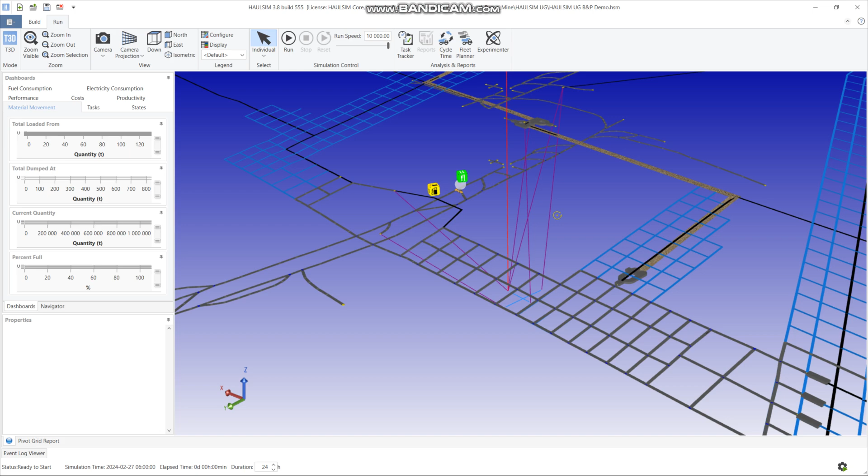Hi guys, I thought I'd just make a quick video of the underground bord and pillar demo that I created a while ago. So just to understand what you're seeing here, obviously the red line is the shaft going all the way to surface, and the purple lines are the ore passes going to the shaft bottom.

What you see with this funny material, that's the conveyor belt. So you've got a bottom conveyor belt. It's basically two levels that we're working at, the 380 level at the top and then the 290 level at the bottom, but they obviously join up because of the bord and pillar sections.

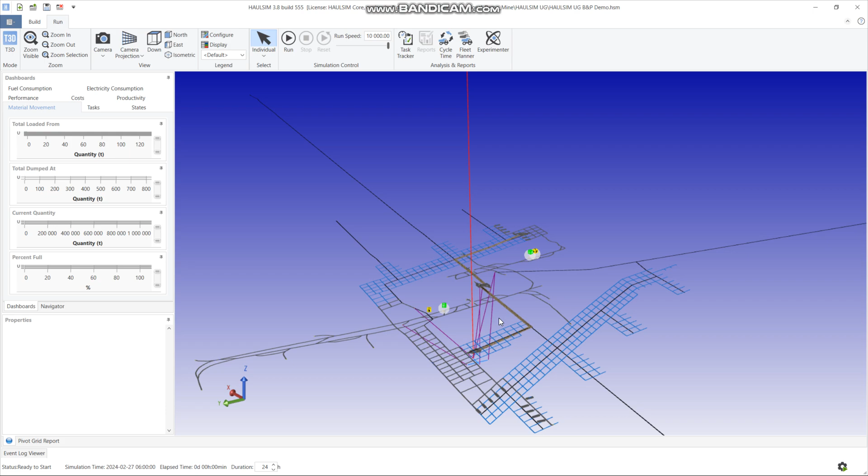So the bottom one is this conveyor belt here where these loaders are going to feed this belt tip, and then here at the top at the 380 level, there will be a bunch of other LHDs that are going to feed the belt tip here, and then all the ore goes to the ore passes and then goes up to surface via the shaft.

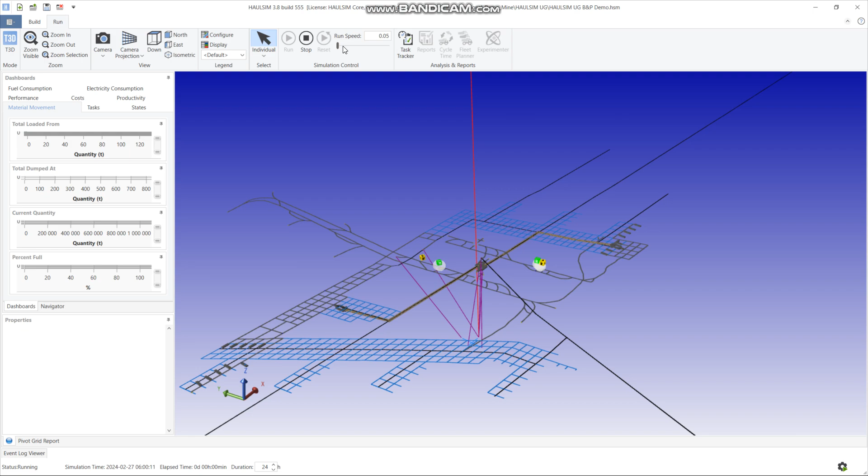I'm going to play the animation first, starting slowly. As you'll see here, it's now 6 o'clock in the morning and the shift has come in, and then you'll see the top LHDs. These are Caterpillar R2900 LHDs. They've got about a 17-ton payload. So at this point, I've only assigned one LHD per loading face.

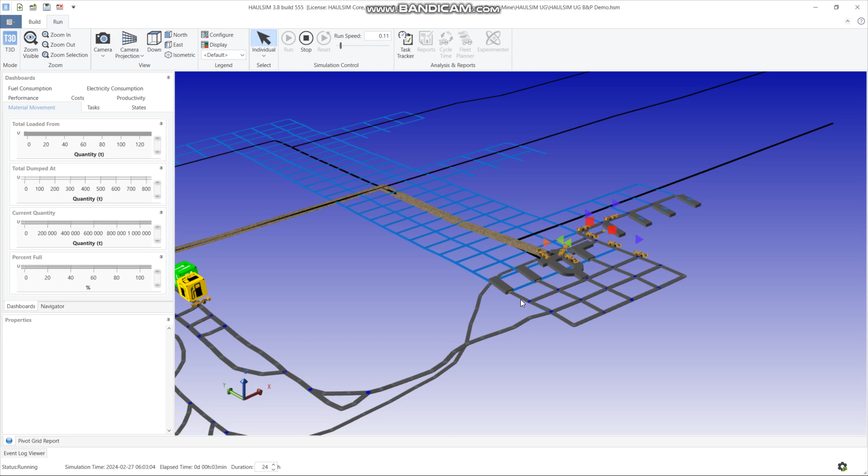And then you'll see with the purple triangles, it shows that the LHD is now full and they're now offloading at the belt tip and then returning back to their individual loading faces. This is at the 380 level here at the top, and at the bottom the same is happening. There's a few more faces at the bottom. There's about 18 LHDs in total running around and feeding these belt tips.

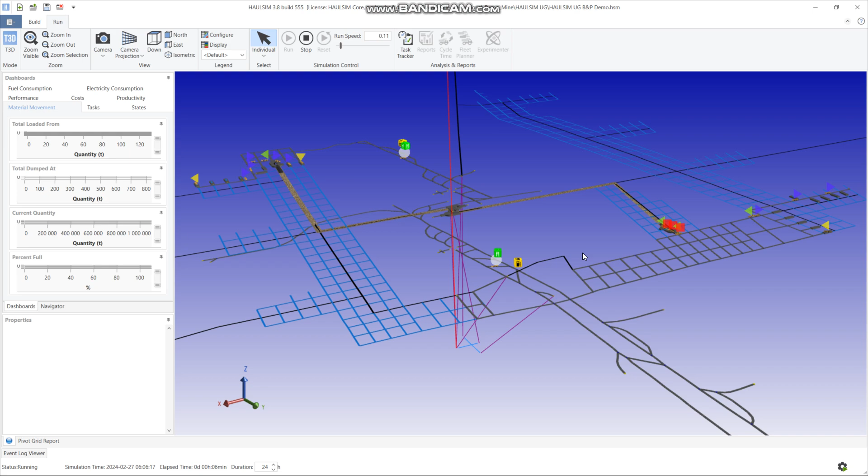If I speed up the simulation, you'll start seeing that the conveyor belt's actually going to start moving with the material on it. So there you can see the reef or the ore material that's now flowing on the conveyor belts. So there's the bottom one and here's the top one. And then if I speed it up even further, you can see the material flowing.

I've built in an hour shift change that's going to occur after 12 hours. Let me speed it up further. So 5 o'clock in the afternoon, there's going to be the shift change, and then at 6 o'clock the new shift comes in. And then I've also built in a fatigue break at 20 to 1 the next morning for 20 minutes. If I speed it up even further to full speed, we'll just wait a couple of moments. Just want to show you guys what the results are when we report it out.

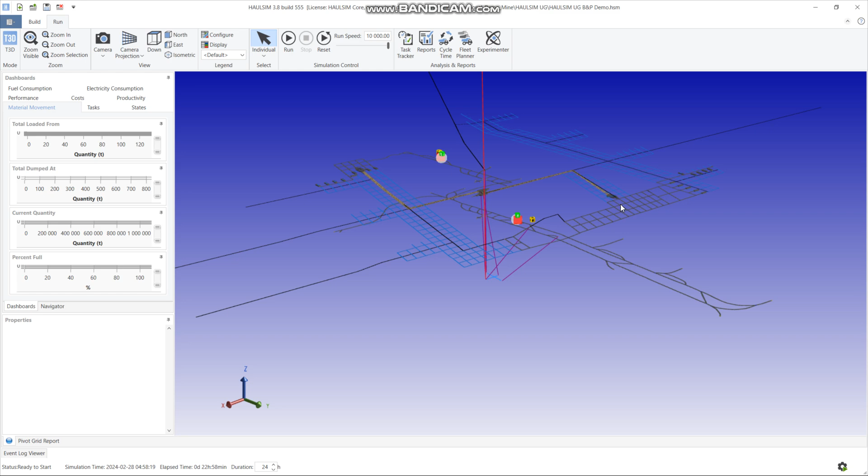You can see the red blocks are when there's queuing or blocking. There's a significant amount of queuing at these belt tips because we only have the one belt tip that has to serve about 9 or 10 of these LHDs. Looking at the reports,

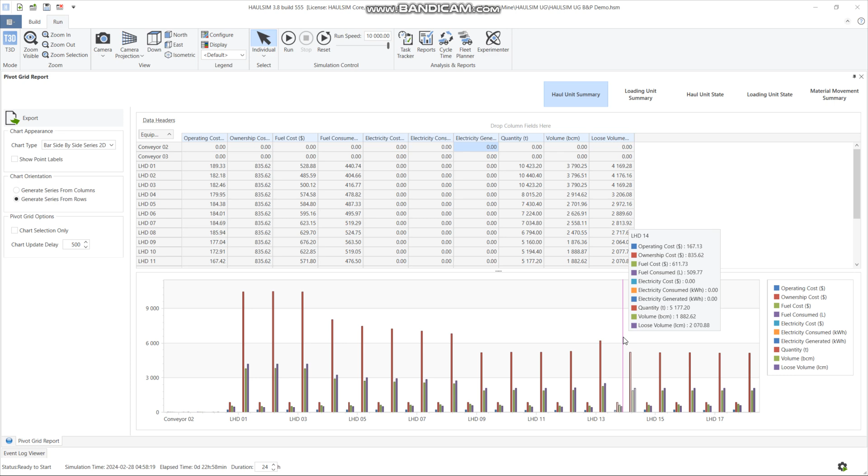the first one is the haul unit summary, where you will see for each and every hauler your cost, the financials, the operating cost, ownership cost, the fuel cost, fuel consumed, and then the quantities that every LHD moved. You'll see the first 3 LHDs actually have very good productivity, and that's because they're quite close to the belt tip. And then the later LHDs, especially the bottom ones, don't perform that well because they are a bit further away from the belt tip.

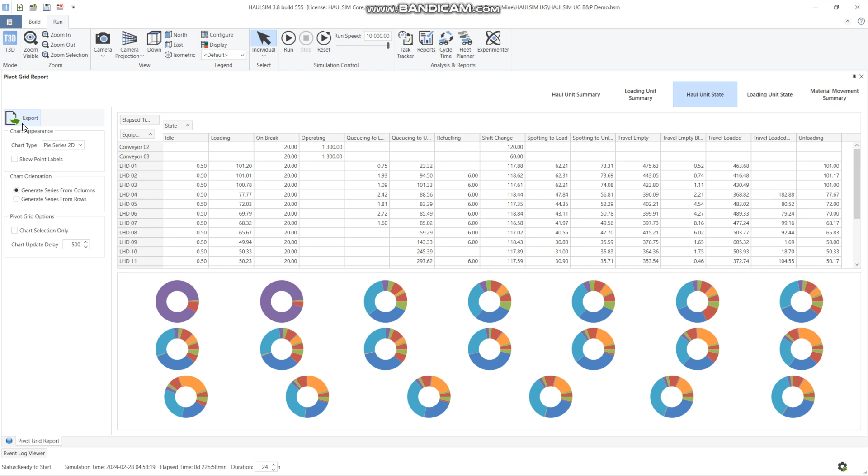So here you'll be able to see the idling times, the loading times, when it was on break with the fatigue break, queuing at the loader, queuing at unloading, refueling, shift change, the spotting times, the traveling times, and what have you. So this is the breakdown, and all these results can get exported into Excel. And then the last thing that we can look at is the material movement summary, just to show for these two different belts the amount of tonnage that was moved to them.